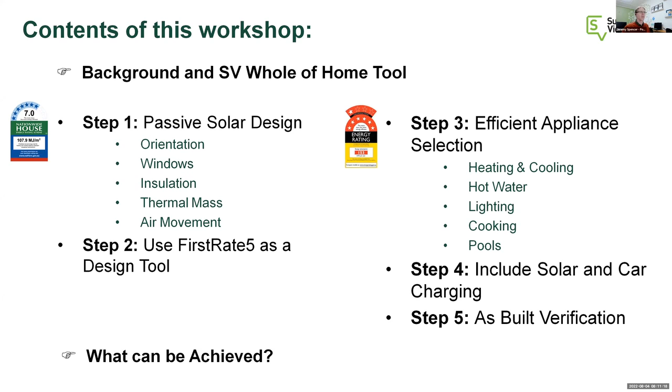And lastly, as we move into high performance, that does impose a bit of risk on builders, designers and thermal performance assessors as we're promising more. So I'm going to talk a little bit about as-built verification and what can be achieved. So a lot to get through. Let's get into it.

Background and Sustainability Victoria Whole of Home tool. So this is basically why we're here.

And what that means is that every industry in those countries is going to have to wean themselves off a fossil fuel, some call it an addiction, a fossil fuel way of producing what they do, to a low carbon or net zero carbon way of producing their product.

And if you look at that 36 billion tonnes of carbon dioxide currently being produced, 39% of that is related to the building and construction industry, either in the operational energy use of our buildings or the energy that goes into the production of those materials and the associated carbon. That's a huge amount, 39%. And if we're wanting to flatten this curve, the onus really is on the building industry, rolling up their sleeves and getting on with it.

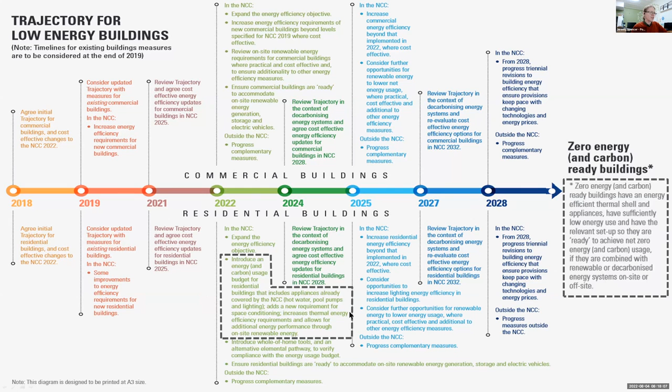The other thing I want to point out is what's happening in 2022 for residential. Let's have a read of this. It says to introduce an energy and carbon usage budget for residential buildings that includes appliances already covered in the NCC - hot water, pool pumps and lighting - adds a new requirement for space conditioning, increases thermal energy efficiency requirements, and allows for additional energy performance through on-site renewable energy.

And if that sounds familiar, that is because that's exactly what the proposal is. We'll see exactly what gets through in September, but this is the proposal at the moment.

And the way that's going to work, that's heating and cooling, lighting, pool pumps, hot water, and on-site generation. And the way it's going to work is this.

When you do a thermal performance assessment, when you do a rating, you will first of all have to get the house to 7 stars. That's a baseline - you can't go lower than that. You have to get to 7 now.

And you also have to show on your plans that you're putting in appliances that meet an average level. They're calling it a benchmark appliance. So in each one of these categories, there will be a benchmark appliance.

It's not energy generation, that's a little bit separate. But in the other 4 there's sort of a benchmark level. And if you put in a heating and cooling appliance, if everything is above the benchmark and you're above 7 stars, you pass.

The other way you can pass, you can do a little bit of a trade-off amongst these appliances - you can have, say, a heating and cooling appliance that's below the benchmark, but your hot water might be above the benchmark. And when they do the calculations, the house as a whole is above the average benchmark home.

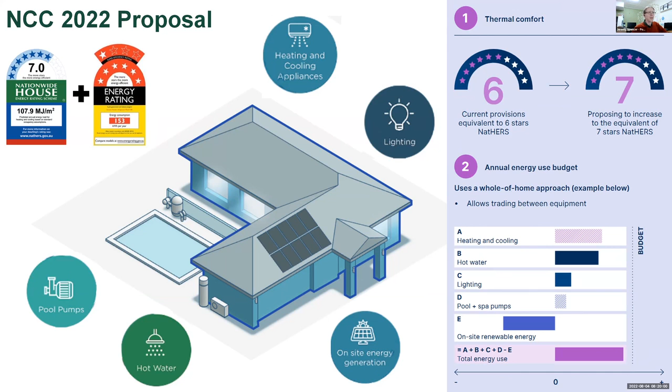The other thing that could happen is you could have all of your appliances below the benchmark, but put on enough photovoltaics on the roof to lift the house above the average energy use of this benchmark home. So that's the proposal that's coming our way.

What that will mean, of course, is that you're going to have a bit more information to provide. If you're a designer listening to this, you're going to have to start putting information on your plans about what appliances you're going to put into it. And I'll show you some of the choices as we go through this.

So this is the FirstRate5 Whole of Home Pilot Tool website portal, and I've put one of my projects through it. So what you do is you do a normal thermal performance assessment on the shell, as per normal, using FirstRate5 software in this case, and then upload it to the Whole of Home tool.

And then you're met with some pages, and here you get to put in the appliances you put into the home. So in my case, in this house, we had reverse cycle air conditioning throughout for heating and cooling - it did both - and you just put in the number of stars.

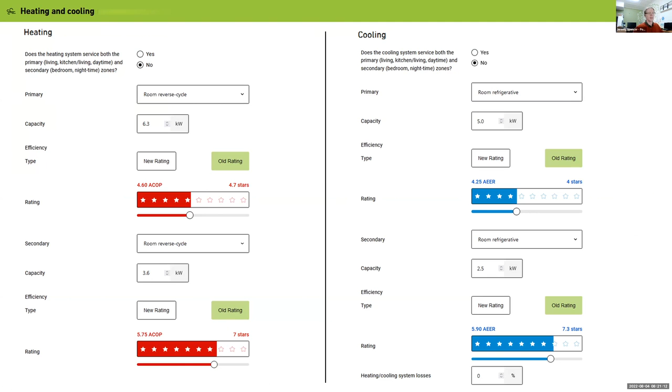The tool is quite useful in that it just tells you what information it requires. It doesn't take particularly long to find that information and put it in. I think it'll be maybe 15 minutes to run this whole simulation.

The next page, after you put in heating and cooling - and later on I'll show you some of the options that you get to choose from - but this is for this particular home that I did. This is what we had.

The next page has cooking. This was an all-electric home, so we had an induction cooktop and electric oven. But I do want to point out that under the 2022 proposals in the NCC, cooking is not part of the whole of home system.

However, under the trajectory for low energy buildings, they do talk about adding other modules later, so my guess is later cooking might be added. At the moment, pool pumps is in there, but not pool heating, so pool heating might be added at a later stage, and maybe even car charging down the track.

Water heating, we had a heat pump water heater. Like I said, it was an all-electric home. It was a high efficiency version. So we're putting in good appliances here.

Now, under plug-in appliances and lighting, you get to put in what your lighting is, either 3, 4, or 5 watts per square meter. So if you're a designer, you might want to start doing a lighting schedule if you're not already, so you can show your LEDs at 3 watts per square meter, and you pick up a few points here. If you're a thermal performance assessor and don't have that information, it will just default to worst case scenario, which is 5 watts per square meter under the construction code at the moment.

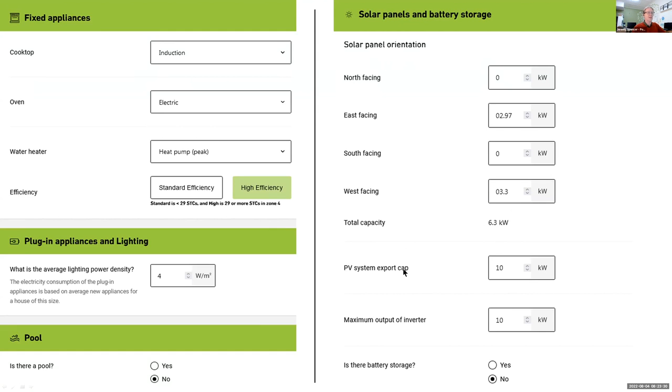All right, so that's all the information you have to add. It doesn't take very long, especially if that was already on the plans. Then you press calculate, and it simulates a year of operation and using the house.

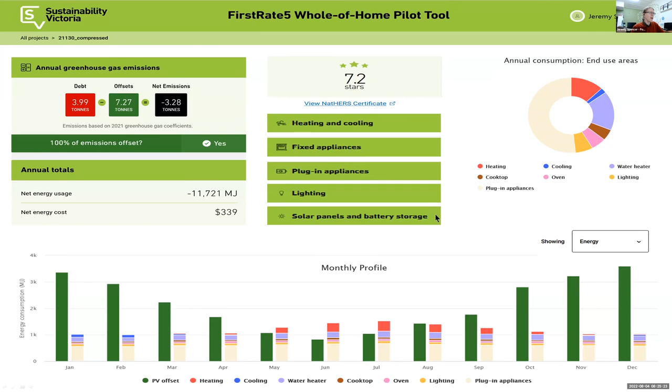The tool also splits where the energy is being used in the house, by energy use, by emissions for the different things going on in the home, and also by the cost to run those areas of the home. So this is my sort of feedback on using the tool.

I'm really quite excited about the tool. It will answer a few questions. First of all, it will answer for homeowners and for builders and designers how much photovoltaics would I need to put on the roof of this particular home for it to break even. And a lot of clients want to know that.

That's one question. Also, potentially for the savvy builder, designer or developer, you could do point of sale upsells on appliances. I had exactly this situation this week, where a client was asking me about the difference between an efficient heat pump hot water system versus an instantaneous one, because they liked that the instantaneous uses less space, which it does.

That's their good point, so we ran it through the tool. What we found was there was a $400 difference in running cost over the year — going from the instantaneous to the heat pump was $400 less per year to run. Also, the instantaneous produced over 2 tonnes of carbon dioxide a year, so there was a big saving, like a 4-fold saving in the amount of carbon that goes up into the atmosphere by going to the heat pump version.

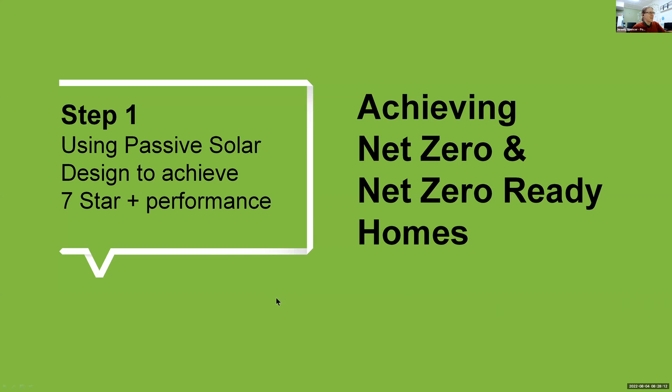All right, so step one is using passive solar design to achieve 7-star plus performance. Passive solar design, as I said, is just designing for climate and to be comfortable in that climate. In Victoria, most of the time we're trying to heat our homes, as I mentioned, so if we can get the sun to come into our homes in winter, we'll get some free heating there and lower our energy use in the home.

Likewise, in summer, on the afternoons, especially around Melbourne, we often get sea breezes — you get evening breezes in a lot of places throughout Victoria. If we can design a breeze path to pick up that, again we get a little bit of free cooling, which raises your NatHERS score a little bit.

If you can lock to the mass of the earth, that'll give you much more stable temperatures inside. The outdoor temperature can be going up and down, fluctuating, but if you're locked to the mass of the earth, your internal temperature will be much more stable. So I look at this a little bit like a solar hot water heater.

You're still going to be putting on space conditioning, mechanical heating and cooling, but in the first instance, by using natural resources you've minimized and provided most of the heating and cooling in the home, and the mechanical services are really just an extra booster — like on solar hot water, you get that booster on the back if it's not quite the right temperature. That's the idea here.

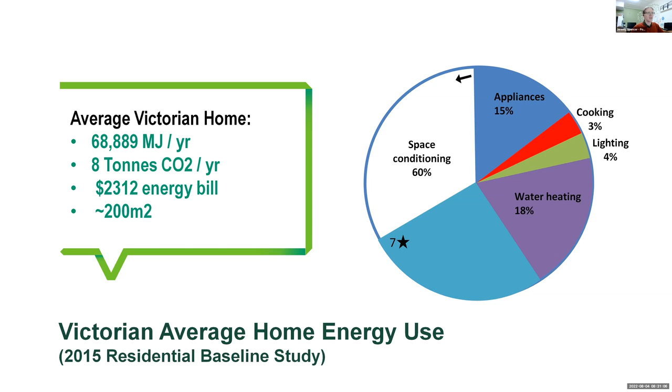However, we don't need to go to 10 stars. 7 stars is plenty to get to a net zero outcome, as you'll see as we progress. All right, let's get into the secrets to 7, 8, 9, and 10 stars.

Sorry, Jeremy, just before you jump in there, got a couple of questions that might be relevant. The lighting standard, that's at 4 watts now for housing, or we think? It depends on outdoor or indoor. I can't remember exactly, but I'm pretty sure it was 5 watts. Yeah, look, I'm not sure if that's changing. That might be one of the details we'll need to see when it actually comes out. I'm sure there's a lot of designers yelling at their screens right now. Sorry, I control the construction side of Positive Footprint, I'm not doing the design part, I'm not 100% over everything. I have a feeling it might change to 4, but I'm not sure. We'll have to wait and see in October when it comes out.

And there's no provision to include batteries at the moment, is there? You can put them in the tool, but under the NCC it doesn't talk about batteries at the moment. You can put them into the Sustainability Victoria tool and see what benefit or otherwise they may have, so it's a useful tool for giving you feedback from that point of view.

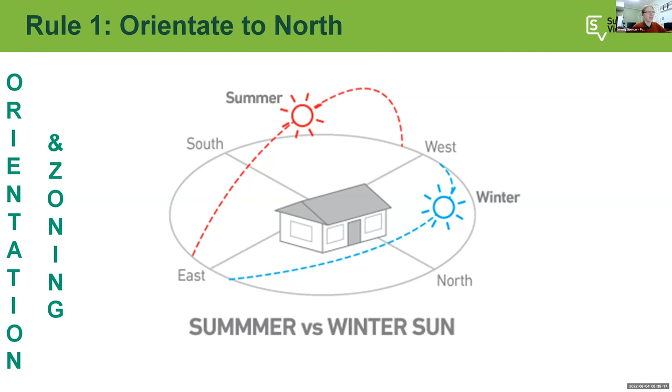So first rule: the sun rises in the east and sets in the west, but it doesn't go directly overhead because we're in the southern hemisphere. It goes on the north part of the sky down in Victoria, which means if we put our living spaces and appropriate windows on that north side of the home, we can get free winter heating for nearly 12 hours a day during winter, which is when you need it. Also, because the Earth is on a tilt as it goes around the sun, it's higher in the sky in summer, which means we can put an eave on that north side of the home to keep the summer sun out. So we're very lucky like that.

Now I'm going to give you a quick rundown of the quintessential passive solar design layout. North is up the page here. There's no overshadowing, so it's sort of perfect conditions, but this is how I like to think about things, and then we'll discuss them.

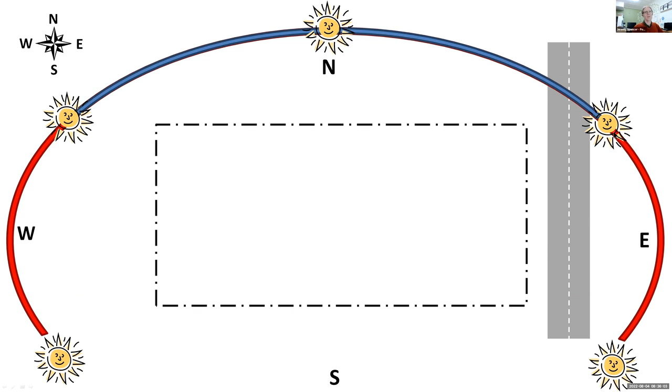First, I put on the sun path, and you'll notice it's red and blue. That's because the sun doesn't always rise in the east or set in the west - in fact, it only does that on the equinoxes. In summer, the days are longer; it rises in the southeast and goes all the way around, setting in the southwest. In winter, the days are shorter; it rises in the northeast and sets in the northwest. We can use that with our layout, as you'll see.

The other thing I always like to put on is the prevailing breeze. This particular design was in Melbourne, where we get a lovely sea breeze from the south in summer - it's the summer breeze you want for potential cooling. So wherever your local summer breeze is, that's what you put on there.

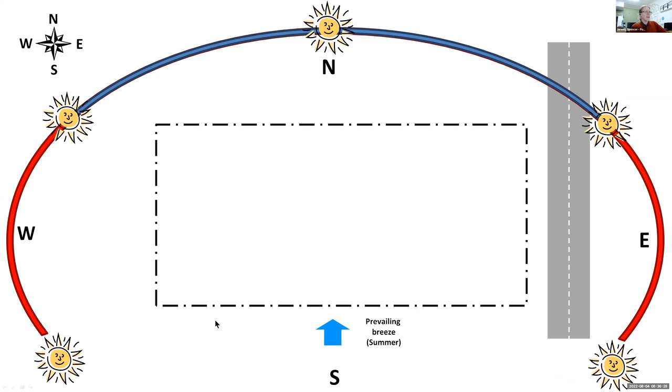This is how I generally do a layout. Living areas go on the north. The reason is that people can be in those living areas all day and well into the evening, so we want to prioritize them. NatHERS software assumes people will be in there long hours wanting comfortable temperatures well into the night, so we prioritize the living spaces by putting them on the north.

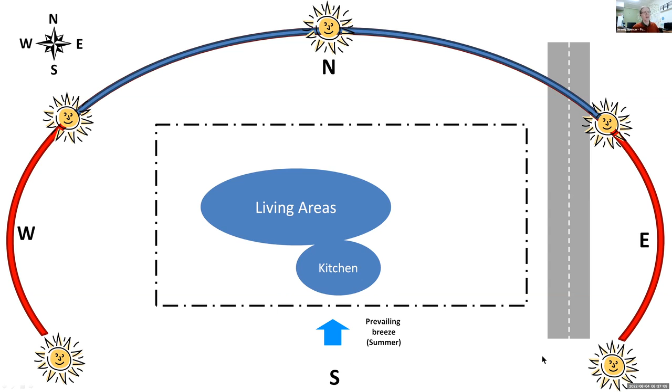I like open plan living areas - it makes a smaller home feel bigger. If we put the kitchen on this side, with windows on the south and windows on the north, we could easily have that breeze blowing across our living space in summer, where people are hanging out. Not a bad setup there.

Kids' bedrooms I put at the back of the home - a fairly standard place to start, good for a bit of security, but I've also put them there because in summer the sun sets in the southwest. The last thing you want in summer, when the sun's really low and getting under all the horizontal shading you've put out, is that last burst of sunlight coming into the living space. So the kids' bedrooms act almost like a buffer from that summer sun.

Of course, you don't want the kids' bedrooms being uncomfortable at the end of a summer day either, so you wouldn't want the windows too big on that west side. You might want to put in some shading from that summer setting sun, which of course doesn't block the winter sun. A bit of landscaping is always quite useful there.

Master bedroom at the front of the house, just to split it away from the kids for a bit of privacy. We could have put it on the south, but since there was space, we put it on the north, because the more rooms you can put on that north side of the home with windows onto them, the better the performance of the home is going to be.

That left the space on the east for the garage, which serves a similar purpose to the kids' bedrooms, but this time for the morning sun. You don't want your home heating up really early when the sun's rising in the southeast - the later you can delay the heat-up of the home, the better. So the garage acts as a buffer from that morning sun.

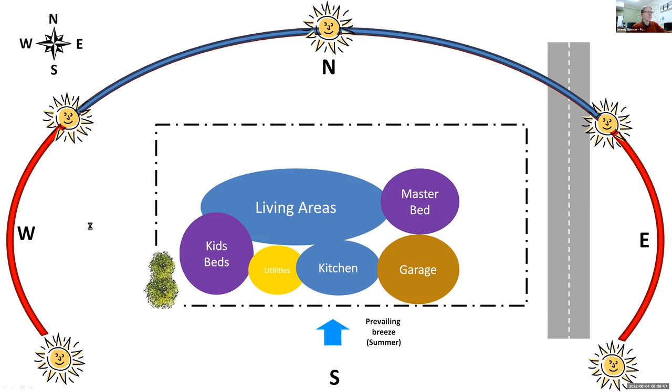Here's the outcome of that particular floor plan - you can see the living space, bedrooms, everything just like I showed. This one came to 8.1 stars.

I say that mainly to point out that this design is not perfect from a passive solar point of view by any means. You can see that the master bedroom area, when the sun rises in winter, actually gets in the way of the sun shining into that living space - in fact it probably won't get through until the sun moves around into the mid-morning.

My point here is that you don't have to be perfect. We could have gone straight across there, but we actually wanted to have a setback courtyard, so you have a bit of a better outdoor facility for that family who lives in that home. But this is what I ask myself, or what you should be asking yourself as well: are my living areas getting north sunlight most of the day in winter? So it's really just the logic that I'm getting at here.

With all of these rules, you don't need to know too many formulas and that sort of thing. There is one that I'm going to show you, but most of all, it's about the logic of it. I'm just trying to get sunlight into my living space most of the day in winter. And if you do, that will be a tick.

If you can also answer this question, how many other rooms are getting northern sunlight in winter, and some of the other rooms are also getting northern sunlight, well, that's a big tick. And you can say, right, I've done this rule pretty well. If the answer to both of those was no, well, that would probably be a red flag. And you'd want to hit the other rules that I'm going to go over shortly, you'd want to hit them well.

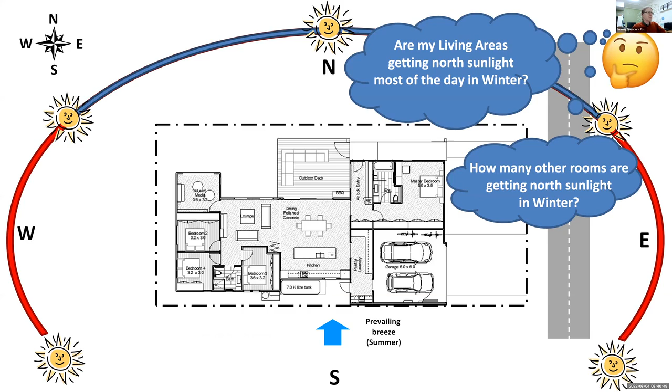This is the particular home in question. Two things to point out. One, it doesn't have to be this style. Style is independent of passive solar design, it can be any style.

Though I do want to promote the idea of making a spot for photovoltaics. Photovoltaics are one of the technologies that makes the whole net zero thing we're trying to achieve as humanity possible in construction. And also with potentially car charging later on, photovoltaics are only going to become more useful in the home. So if you can make a spot for them to go, all the better.

Okay, another thing to think about when you're looking at designs that come across your desk, this is the elevation. So I always start by opening up plans. I look at floor plans and look at the layout - are the living spaces on that north side? Great. Next thing I'll do is look at elevations, and I'm wanting to see which elevation is likely to be north. And the one that has the most windows, ideally, is the one that's north.

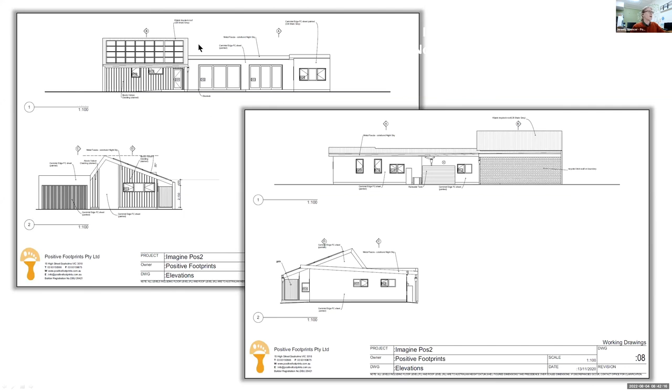So in this case, this is the elevations of the design you just looked at. You already know that this one up top is north. But you should be asking yourself, when you're looking at your own plans or plans that come across your desk, can I work out which direction is north by looking at my elevations? And if you say to yourself, well, I reckon that one's north, but you find out that's actually east or south, that would be a red flag. Maybe send it to the thermal performance assessor or just query it with the designer, if you're the builder looking at it.

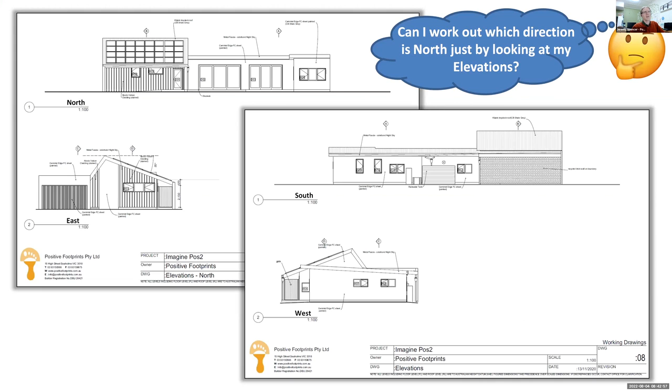I put all the directions back in there. So that's basically the question you just want to ask yourself there. That's all about orientation. And it's as simple as that - I know that was a perfect situation, by the way, there was no overshadowing. If there is a neighbour on the north, well, maybe you've got to go double story to get that sunlight coming in if you want those 3 points.

I should also point out that with that particular design, I did a couple of things. I tried rotating it east and west, because some people were worried - well, what if I don't have a good block, what if it's got a bad outlook? If I rotate that design, the set of 8.1 goes down to 7.7, 7.6 if I rotate it east and west. If I rotate it the whole way around, more like 7.5, around about a half a star decrease. And that's because I didn't go overboard with windows, which we're going to talk about right now.

The other thing that I also modeled was, what if it's facing north, but we've got a 4-story neighbor all the way along the boundary line?

Worst case scenario, it went down to 7.2. So my point there is that orientation is great - you can pick up some fantastic points, but it's not a killer.

Rule number 1: we've orientated our floor plans to try and pick up northern sunlight, and it might mean you move the living space around. If there's shading at the front of the block, living space goes to the north. If there's overshadowing at the back, living space might go to the front or upstairs. You've done what you can to get northern sunlight into the living space most days in winter - that's a tick, and you're on your way to getting into that 7-star band quite easily.

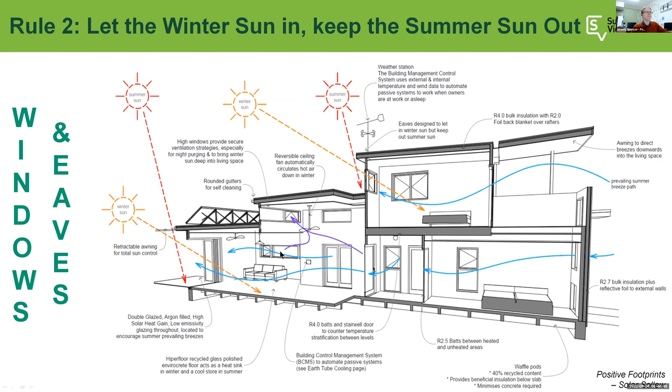Window consideration is crucial to performance. I used to do literally thousands of energy ratings as I was getting this company going. What kills designs is having too much windows and having them in the wrong spot. Once you've insulated a home, up to 40% of its heating energy can be lost through windows on average, and up to 87% of its heat is gained through windows. So windows are really important.

To put it into perspective how important it is not to overglaze: windows are great during the day if sunlight's coming in, but they're not great at nighttime, typically during most of winter - they're just losing heat for you.

If we look at this wall, so you understand how much heat they lose - this is a 90mm stud wall, and in the stud work we've got R2.5 batts, maybe R2.7 in this one. We've got a permeable reflective foil on the outside facing onto an air gap, maybe another half an R rating. Then if you include the plaster and the Ecoply on the outside, I've got about an R3.5 of insulation across the wall.

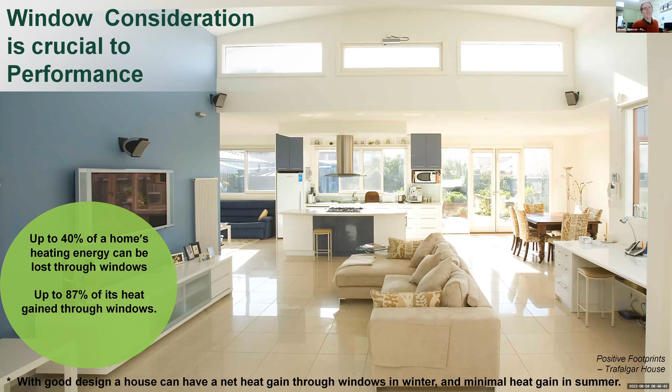Now these windows, in fact, are double glazed, argon filled, low E coated, timber windows - pretty high performance. Even with high performance, they get to an R rating of about 0.5 versus R3.5, so they're still losing and gaining heat 7 times faster than the walls next to them.

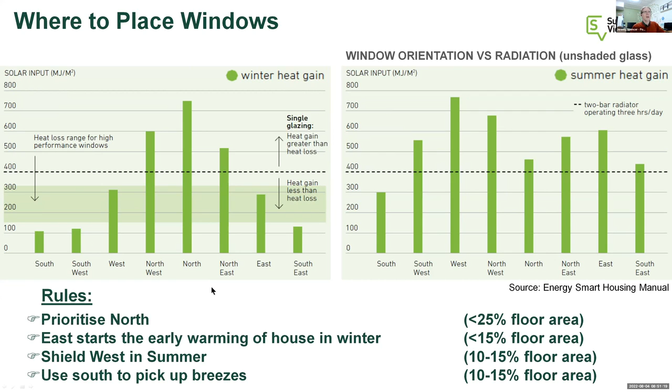Now, if all those percentages get a little bit hard, I don't actually use that when I'm looking at other people's plans, doing some sort of consultation. What I'll do is simpler: I'll add up the total floor area of the whole house, and add up all the square meters of window, and ask, is the window to floor area less than 25%? And are most of the windows on that north side of the home—is the highest proportion of windows on the north side? If yes, then tick, this house is probably going to do pretty well.

Now, you can push those areas a bit. If you start to have high performance windows and mass, you can maybe push up to 30%. We'll talk about thermal mass shortly.

Now you have an idea of how much window area you need and where it should go. But if you're putting them on the north, you also have to think about not putting them into shade. You can have shade on the north side of your home—other houses close by that are shading that north side. Like in this situation, instead of having a floor to ceiling window, you might want to raise the sill so it's out of the shade.

If you have an articulated face, even though it's facing north, you're going to get a bit of shade on those windows. You're trying, because the window is the weakest element of the thermal skin of the home, to just get into the sunlight. That's the main point of this particular slide.

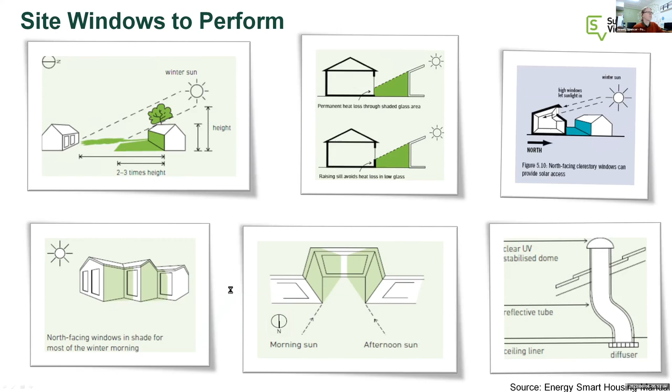So we put most of our windows on the north. How do we shade the windows in summer? Even though north windows are still pretty good in summer without eaves, they become even better with eaves, so you definitely want to put them on.

There is a simple rule that works really well for Victoria, called the 45% rule. This is a rule for how to design an eave that will let in the winter sun, which is lower in the sky in winter, but keep out the summer sun, which is higher in the sky.

It works for the north, but doesn't work for east and west, because the sun is rising and very low in the sky when it's rising, and very low in the sky when it's setting, and will come in under any eaves. East and west, you either want to minimize windows, put in some plantings, or have some vertical shading, something like that. But for north, we can design an eave that will just sit there and do the job.

This is how the 45% rule works. You measure the distance from the sill of the window to the underside of the eave, and whatever that distance is, your eave should stick out 45% of that distance. That includes to the furthest shading point, which is usually the gutter.

So for instance, if that height there was 2 meters, 45% of that is 900 millimeters. Maybe my eave has a 150 mil gutter. That leaves the actual eave part at 750 mil. So I'd be having a 750 mil eave sheet there, or cutting down to that.

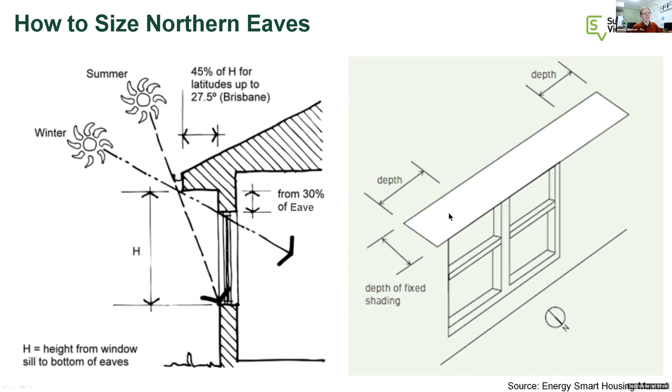So that's how you design the perfect eave on north. Just remember, the sun is not always directly in front of the window, so if you are just putting eaves over windows individually, just run them past on either side by whatever depth you worked out for the eave, and that'll do the job.

And then I like to think, when I'm looking at plans, that I am the sun. Obviously, if you're a designer, you can model these things in your software, but it works really well.

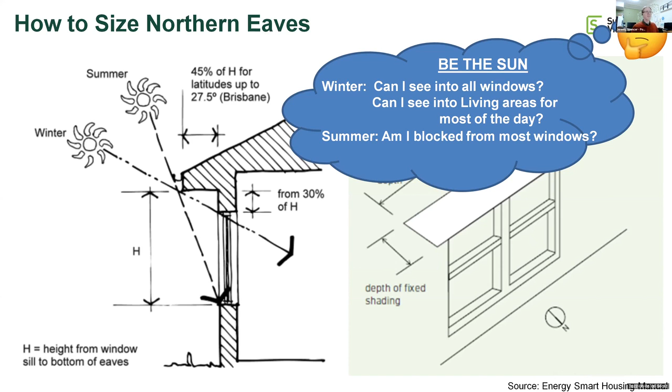Then I do the same thing for summer. Now I'm at 78 degrees or so for Melbourne, and I'm going much higher in the sky, looking down on my plans - are the eaves actually stopping me from seeing in? So you can just imagine yourself as the sun.

All right, so assuming you've used the 45% rule and designed your eaves well, the next thing to think about is the performance of the windows you're putting in. They're mostly on the north, then east, west and south, but still they're the weakest element. The higher the performance you can achieve for your price budget, the better your house will perform. Windows make a significant impact, possibly the biggest impact of them all.

So what do you need to know when designing or choosing windows? There are three different numbers you need to know: the U value, the solar heat gain coefficient, and air leakage. The most important of those is U value, so I'm going to start with that.

U value is just a measure of how well a window conducts. So with windows, instead of talking about resistance and R values, they talk about the opposite, which is U values. Now, you don't want a high U value — you actually want a window that resists heat flow and keeps the temperature inside the home, not letting it out in winter or gaining heat in summer. When we're talking U values, you need to be aware there's UW, which is a whole-of-window U value.

Most documentation you pick up will be talking about the whole of window, and that's what you want. But sometimes you might pick up a U value that's just talking about the glass, or the U value of the frame, or if it's double glazing, the U value of the spacer. All those things get added together to become a U value for the window. So just make sure you're looking at the right data.

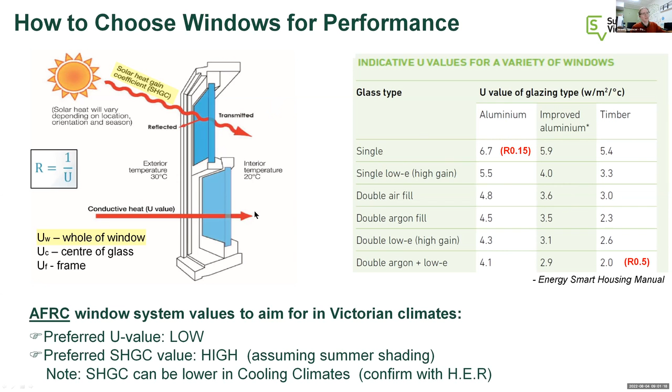Okay, now that you've got that information, how do you actually choose windows? Well, there's a fantastic resource for the industry called the Windows Energy Rating Scheme, and all of our windows have to get rated under that. You might have seen AFRC, Australian Fenestration Rating Council, or certification, on the previous screen.

They all have to be rated under the same protocol, and all of the windows that get rated go to this Windows Energy Rating Scheme dot net database. Every now and again, I like to go to this database and just see who's making good windows.

You don't necessarily need to think about whether it's double glazed, single glazed, low-E coated, or argon filled. The U value covers all of that performance. Those things all add into the U value number, so really you can just judge things on U value.

So I like to put in a U value here. I like 2.5 or so, but anything under 3 is pretty good. And for solar heat gain coefficient down there, I put 0.4.

Then you just search the database. You can choose what type of window, what type of opening. We like casement windows, so I put that in, press sort, and you get a big list. This list actually goes down to 98 items in Victoria for casement windows that satisfy my criteria.

Once you're on this page of the website, I do three things. First, I rank by U values. You click on this and it ranks them by the U value.

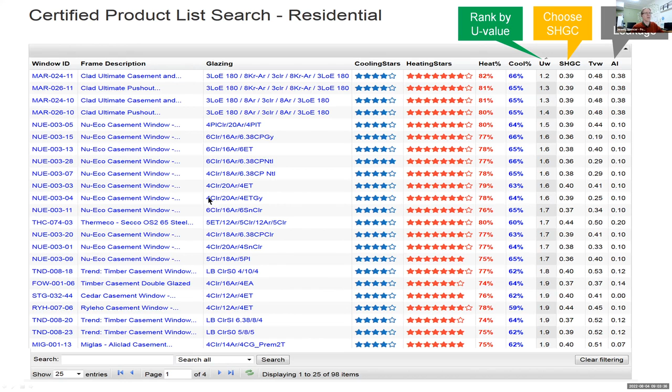Then you can go to those window manufacturers, send them some window schedules, and get an idea of their price points and what they have to offer. Then you can choose ones that fit in with your price budget and perform the best you can for the price budget of the house.

So very useful resource. That's a lot in rule number 2 - probably the most intense information rule. But now you know where to put windows, approximately what size of windows to put where, how to choose good performance windows, and how to shade the north side of the home.

So you'll be well on track if you incorporate some of those rules into your design, well on track to getting 7 stars and above. All right, the third rule is keeping the heat in and out, and that is insulation.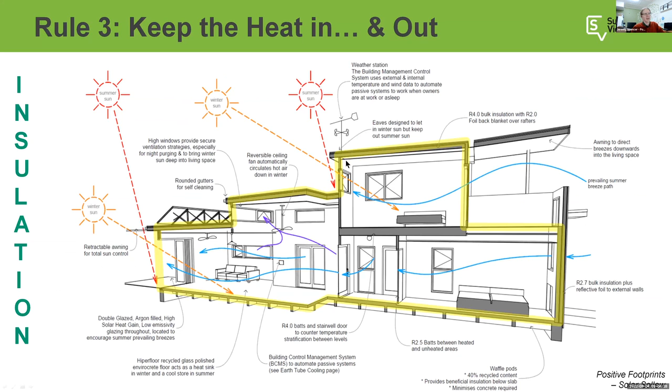With insulation, as you can see in this picture, you want a complete insulation layer all the way around the house. You don't want gaps in it, ideally. You want to think thermal shell.

One thing I want to point out is garages - you should consider those. If you're not already considering those as external spaces, you should, because while they're included in the NatHERS rating, NatHERS assumes a lot of air leakage is going to come through garage doors, which is pretty normal. And often garage doors might be 1 mil steel - they're very conductive, so garages get pretty cold.

So my advice would be to run whatever insulation you run on the external walls just around on the internal walls too. And don't be silly like I did here and put a sliding door going into a garage - they're very, very hard to actually seal. Casement doors closing back onto a bulb seal are much better - swinging doors.

Now this gets to Phil's question from before - should we do internal insulation? The answer is yes. The reason is the NatHERS software zones off the home and assumes that the laundry, WC and pantry don't necessarily need to be as warm as the living spaces, so you can zone the home. Some insulation between the utility areas - pantry, laundry, ensuite, those sorts of areas - they should have insulation around them. You'll get a bit of a lift in the tool, and not only that, your heating and cooling requirements for your home will go down.

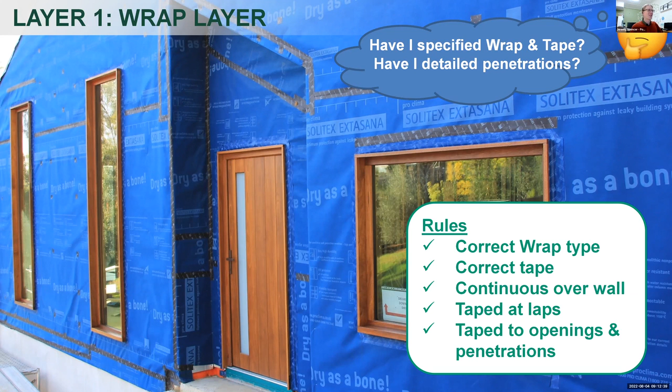You should be taping to all penetrations and so forth. The question I ask myself is: have I specified wrap and tape on the plans, and have I detailed penetrations? Don't leave it up to builders. It's hard for a builder to know exactly how, with windows, to work out the flashings, how to make sure water doesn't get in, and how to tape to windows depending on cladding types - there's a lot going on with windows. So do the builder a favor, if you're a designer listening to this, and put on a detail of how this all works together.

But it does make a big difference. Bradford did some testing a few years back - they clad a big room and sucked air out of it to induce 50 pascals of pressure, the same as a 33 kilometre an hour wind speed blowing over the home, to see how much air infiltration gets in with different strategies. They found if you just put on wrap with no tape at all, you get a 20% reduction in airflow through the wall.

If you overlap and tape all overlaps and tape the penetrations - so taping the wrap to the window, in this case with a couple of windows - you get a 58% reduction in air infiltration. If you do all that plus tape to the top plate and the bottom plate, you get an 82% reduction. So for the sake of a little more tape, think about taping to the top plate as well as the wrap and penetrations. That's easy to do - another couple of rolls of tape will usually do it, maybe 4 rolls.

And taping to the bottom - just make sure that if you're taping to the bottom, you're thinking about your drainage. You may be taping it to the flashing layer at the bottom, so water can still run down and off to whatever drainage, and doesn't run underneath your bottom plate. But it does make a difference.

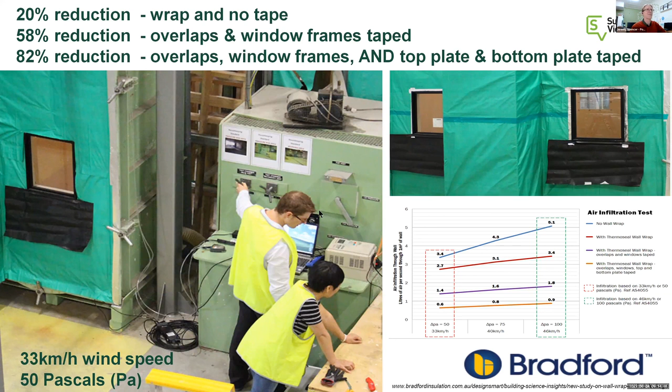The second layer is your bulk insulation layer. Insulation is actually really easy - the rules of insulation are simple, the hard part is the installation, which Sean will talk about. People often ask me how much insulation should I put in, and the answer is as much as you can - the more the better. It's sort of like a water tank: how big should my water tank be? Well, the bigger the better, so it'll catch those big storms.

But most of the time you're only using the first 5,000 litres or so of water in the tank, and most of the time the tank's empty.

It's the same with insulation. You can put more on, and the more you put on the better, but there's a diminishing return. You get a lot of bang for your buck for the first R1 you put in. For the next R1, you get about half the bang for the buck as the first one. For the next R1 after that, you get half as much return again. Basically, there are diminishing returns, so these tend to be pretty cost-effective.

Sizes to put in also work with standard construction cavity spaces. So what will I put in? On the roof, there's usually a bit more space, so typically I'll go for an R4. And these, by the way, are what I will put in whether we design 7 star, 8 star, or even 9 star homes.

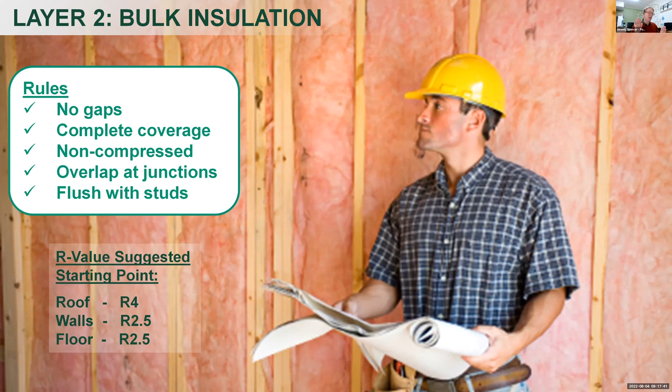And the other thing that's quite important is that your insulation sits flush with the face of the stud, so that when you put your plasterboard on, there's not a big gap behind it. If there's a big gap and there's leaks somewhere, you may find that you get airflow circumventing, going through any leak past the insulation and running down between the insulation and the plaster, and so effectively that insulation isn't working for you. If you make it flush and the plaster sits back against it, there's not that air gap for that pathway to happen.

The last layer of insulation is the tightness layer, and for standard construction that's plasterboard. If I was doing a passive house, that would be lined with internal membranes. But for standard construction, you can get a hell of a long way just by trying to limit the amount of holes in the plasterboard. Plasterboard itself is a fantastic air barrier, especially once it's painted.

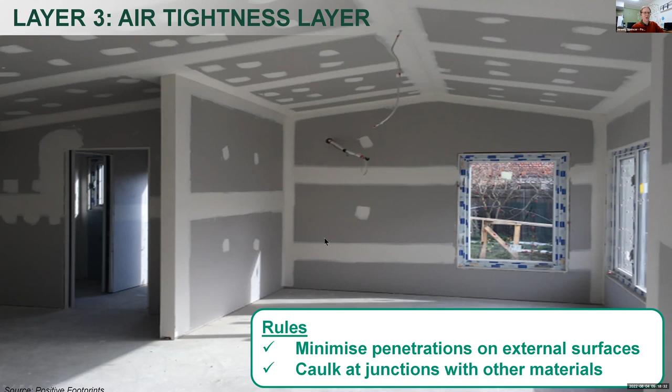It's the gaps and cracks in it that let it down. So things like square set cornice - fantastic joins that last well over time for stopping airflow - and try not to have too many lights and things hanging down. Don't have banks of downlights with holes cut through it, that sort of thing. But Sean will go over all of those; I'm just pointing that out to you now.

The reason it's important though - why am I banging on about tightness? The reason is that the NatHERS software, you see this red line here - NatHERS software assumes that if we have a 50 Pascal load of difference in air pressure between the inside and outside of the house, it assumes 10 air changes per hour at 50 Pascals of pressure. That's what the software assumes. So really, as one of your contractual documents, you should be designing a home that is less than 10 air changes per hour at 50 Pascals of pressure.

Now, not many people test their homes. The CSIRO did a test back in 2015 on new home construction in different cities around Australia. For Melbourne, this is what they found: the average air changes in new homes was 15.4 air changes per hour. So technically, they're not actually meeting the NatHERS rating there.

There's a couple of other lines I've got here. There's 5 air changes per hour. If you get a house down below that, there becomes a point where the house needs more fresh air to come in, because if it's just a sealed box and you're breathing and living in that space, you can have undesirable chemicals building up. So you do need some fresh air to come in. Under 5 air changes per hour, heat recovery ventilation is required.

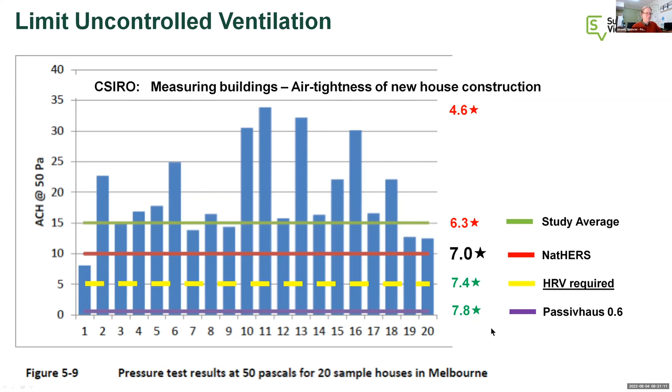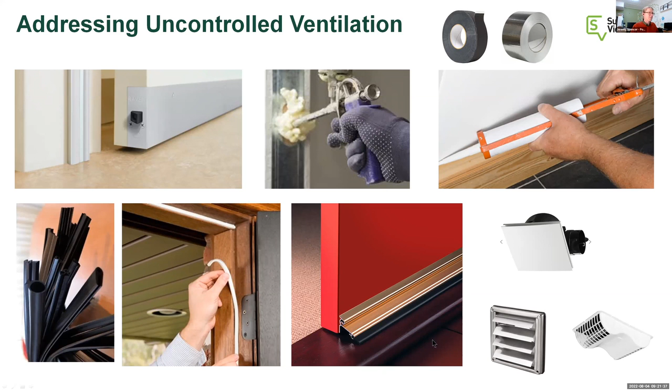It's reasonably easy to make a big impact on the tightness of a new home by simply caulking, gap filling, putting on extraction fans that don't duct straight to the roof space but duct to the outside and have backflow dampers on them. By the way, that's coming in NCC 2022 as a requirement. These things do make a big difference on your tightness levels.

Another thing to point out where a building can potentially fail is thermal bridging. Sean will talk about this, but I want to touch on what I'm looking for when I get my engineering plans: is there any steel that passes from the inside to the outside? The reason is steel is extremely conductive. Compared to hardwood, steel is approximately 500 times more conductive than wood.

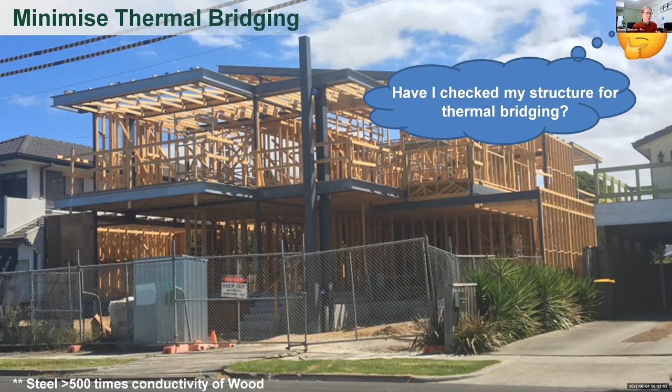Compared to softwood, it's more like 1,000 times. So if you have steel on the inside of your house that passes through to the outside, that could be leaking heat out when you want it to stay in, or bringing heat in when you don't want it inside. It can potentially ruin the star rating or the lived experience of the clients there. So what I ask myself is: have I checked my structure for thermal bridging? That's a nice question to ask when you get your plans back. Is there any steel passing from the inside to the outside? If there is, you want to make sure there's some sort of break, or it's wrapped with insulation or something.

Just a good question to put in there - is floor insulation required between a basement car park and the unit or floor above? It's a performance standard, NatHERS, so it's not required. Hang on, this might be outside of NatHERS - there may be fire prevention reasons that you'd be putting insulation in an apartment situation. So check that, that's more something you look up in the construction manual.

However, in terms of thermal bridging, we have had reports of first floor apartments having condensation under the carpets because they're pretty much fitted over a cold concrete floor. The temperature of the concrete under the carpet is much colder than the temperature inside the unit, so moisture in the air condenses under the carpet. So that's a really good reason to insulate the roof of the car park, if you like. I've seen that done in a couple of places I've visited recently.

I'll just finish that thought. NatHERS is a performance software, it doesn't give you any rules. However, it's not going to perform well or get to 7 stars in a house with an underground car park, say, if you don't insulate above that and the rooms. You're going to have those issues that Phil talked about.

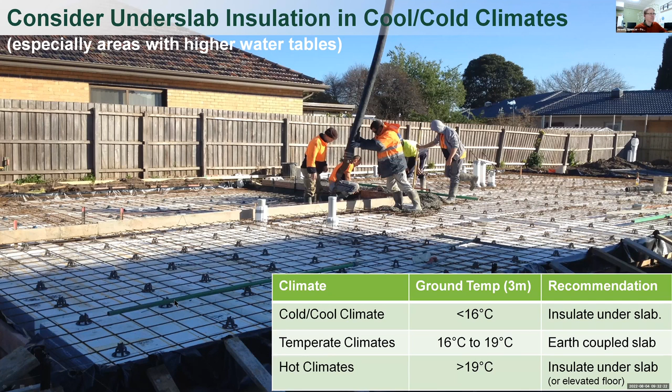In this case, it was a waffle slab. But before you do it, it's easy to know whether it's good or not - just check with the thermal performance assessor when you get your assessment done. It's very easy for them, if you've got a slab floor, to tell you what performance and star rating you'll get if you put insulation under this floor. And if it's good for you, you can talk to clients and maybe do it.

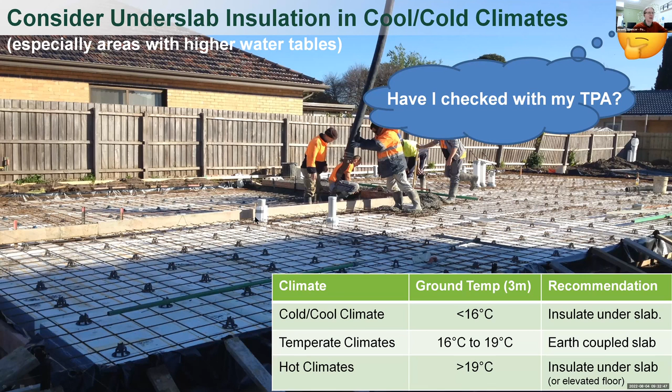So that's basically all you need to know about insulation. Of course, the installation of the insulation is the trick, and Sean will cover that next week. We've done laying out the home, choosing good windows, working out how much to put where, eaves, insulating well, and some general insulation levels. The thermal performance assessor can test those insulation levels - you can start with those general ones I noted, and then if there's more space, ask them what if we put R6 batts in the roof, and they can give you feedback pretty easily on that.

Now we get on to rule 4, which is thermal mass. You don't need thermal mass to get 7 stars, but it will give a bit of a performance boost and make it a little easier to get there. The way I think of thermal mass is this: in a lightweight home, energy comes through those windows, if designed right, in winter, and the home heats up pretty quickly. You've got good insulation that holds it in, but the home can only hold so much heat. It will heat up quickly during the day, and then start to radiate.

The whole house will get warm and it'll radiate that heat away. And then when the sun goes down, even though you've got good insulation, it's not holding very much heat within it, and it will cool down reasonably quickly.

If you put some mass in that home, it's a little bit like having a glass of water and you're pouring water in - that's the energy coming into the home. A glass of water can only hold so much energy, but if you put some mass in the home, you can now hold a lot more energy. It's a bit like turning that glass into a bucket. It can hold more water, it can hold more energy, or turning into a bathtub, depending on how much mass you put in.

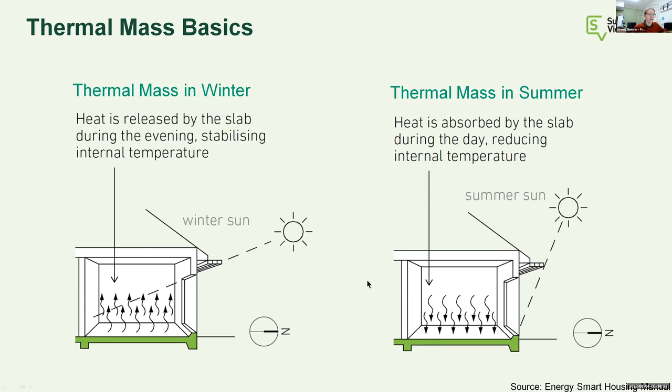And we find that we can get homes quite easily to high 7s, 8 stars, 8.5 with lightweight construction. But to get it into those very high ratings, a bit of internal mass does help. However, there's a cost benefit analysis that you want to do at this stage. And that's why it's a good idea to check with your thermal performance assessor, should I put a heavyweight internal wall in, and where should I put it? And how big is it going to be, and then you can work out whether it's going to be a cost-effective strategy for you. The other thing, I've got a little note here: consider embodied carbon.

With a lot of massive objects, bricks and so forth, they've often been fired in a kiln, and they've got a lot of energy that's gone into them, and so a lot of carbon has been released in just making them. Same with the cement - a lot of carbon dioxide gets released in the creation of cement. So you may very well find, if you're also looking at the embodied carbon point of view, and NatHERS doesn't do this, but you might also find that the operational savings of putting in some mass and getting a bit of a bump in your energy rating is not enough over the life of the house to offset the energy that's gone into it from a purely green point of view.

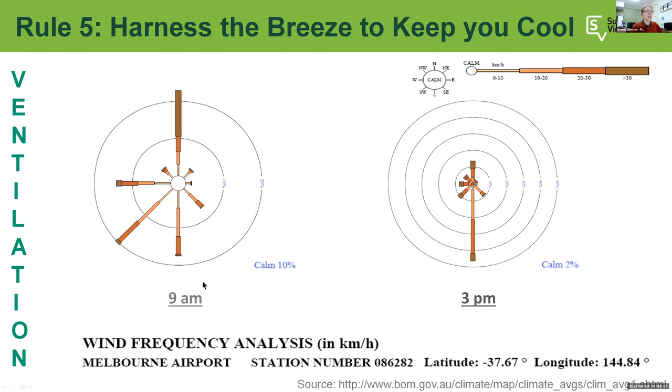If you don't already know where your summer breezes are when designing or looking at a house, you can go to this Bureau of Meteorology website, and I believe you'll have access to these slides later if you want that link. You can find your local weather station close to where you're designing or where the house is, and find out yourself and get your own wind roses and download them.

Once you've got that information - with breeze paths, it's as simple as designing so that breeze can blow through your house from wherever it's coming from. You don't want a situation with one opening where the breeze can't go anywhere - it's not going to want to come in. Similarly to before, where I talked about plaster as a tightness membrane: if you've got plaster that's reasonably tight on the inside, even with gaps and cracks on the outside, the air's not going to want to come in because it's got nowhere to go.

So for your breeze path, you actually want it to be able to come in and go through. You want an opening on the other side - two openings in a room, or down a corridor and then another room, not too far away. You don't want the breeze to have to go in and out too much. It wants to be easy for it to get through.

You can induce breeze. If you've got highlight windows, hot air naturally rises and will draw in wind or breeze from the outside. If there's no prevailing breeze, it will draw some in and replace your hot air with cool air. Fans also - they don't technically cool anything, but they blow air across your skin, which evaporates moisture off your skin and gives you a 3-degree cooling effect locally.

And lastly, don't forget casement windows on the sides of homes. If you've lined up the breeze path with openings on either side, the windows on the side of the home, if you have them with casement, you can angle them so they're all open to scoop in that prevailing summer breeze. Nice little tip.

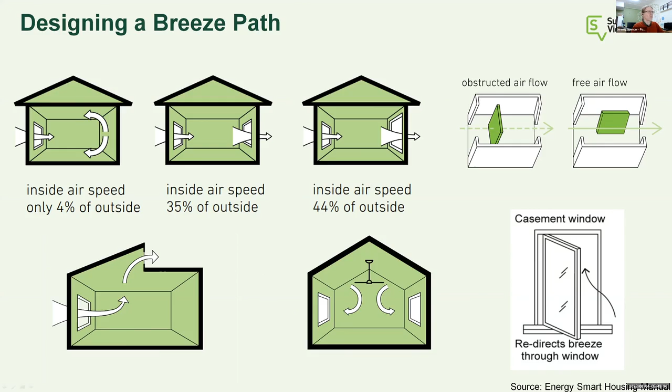Once again, I just imagine I'm the wind, like I imagined I was the sun when looking at plans, and I ask myself: is it easy to get in and out in the direction I want to travel? In my prevailing direction, will it be easy for me to blow in and out? And am I blowing across where people live in summer? If yes, then that's a big tick.

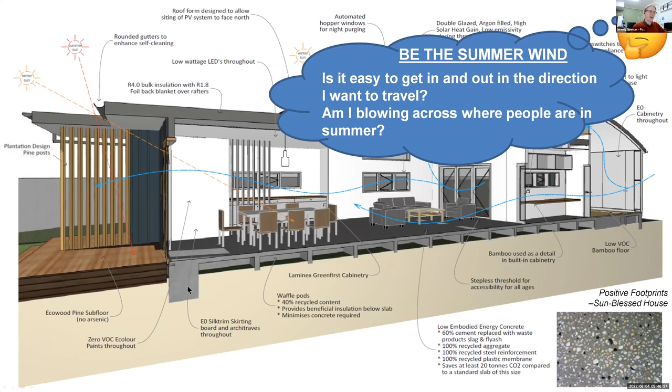Now, it should be said that because we're in Victoria, most of the time we're heating and not so much cooling. This will be lovely for people living there in summer, and you'll get a bit of advantage in the NatHERS software, but not a huge amount, because for most of the year we're trying to keep our homes a bit more closed and we're heating instead of trying to get cooling. This would be different if you're designing for up in the tropics where you're trying to cool all the time - then breeze paths become much more important within the NatHERS software. But still, for just comfort, living in homes with a good breeze path is great when that breeze comes through.

All right, so those are all the rules of passive solar design, and that is the level of knowledge you need to actually work with passive solar design. You don't need to know any more because the thermal performance software does all the calculations for you. All you need to do is understand the logic of what you're trying to achieve, and as long as each one of those rules gets a bit of a tick - it doesn't have to be 100% tick, 70% tick is fine.

Then when you get your rating done, you'll typically be 7 stars or above to start with. So the next step is to use First Rate 5 or any of the NatHERS tools as a design tool to further improve the rating.

For those who don't know what thermal performance assessors do: they get the plans from the builder, often at the point of getting the building permit, when the building surveyor asks if they've had a house energy rating. If not, the plans get sent off to the house energy rater or through the designer, either way.

The thermal performance assessor sits down with the plans and enters all the details into the software - floor areas, wall areas, ceiling areas, what they're made of and finished with, timber floors, carpets, insulation in walls, floors and ceilings, window types, eaves, and overshadowing from other buildings. Everything goes into the model, which uses the postcode to pull up 30 years of local weather data and simulates a calculation for every half hour of every day over 365 days.

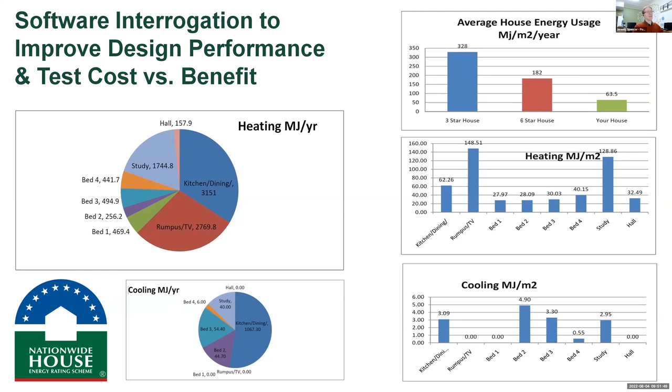So it can be sold to them in that way. But that would be my recommendation for any thermal performance assessors listening to this - they might want to start thinking about how they would do such a report and how they would charge for it. It does mean at the end there's still going to be that compliance report where there'll be changes between the concept stage and final stage. So it is an extra charge, but one well worth doing.

Okay, so that is everything to do with the thermal performance. And if you've done it right, if you've designed right and it gets built right, well effectively you've knocked off a third of the pie. But now you can see, if you look at this pie graph, we've still got two thirds of the pie left.

And this is why whole of home is so useful, because thermal performance can only go so far, whereas whole of home looks at each area of that pie graph, and we can address each area to really minimize the energy use in the home. And the first area to address is - we've knocked off most of the space conditioning, but there's still space conditioning needed. Now we can provide that amount of space conditioning efficiently or inefficiently.

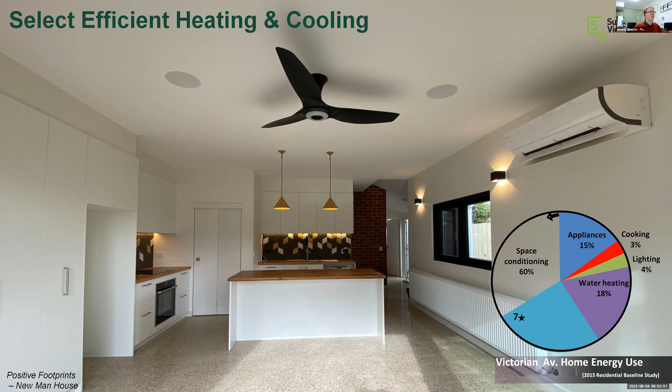In this house we use reverse cycle air conditioning. We actually use heat pump hydronics as well. They liked hydronics - we didn't need both, but they liked the hydronics during the winter.

So in the tool itself, these are the options that you get to put in. You get to put in ducted reverse cycle, ducted gas, gas hydronic, room reverse cycle, room gas, electric panels, slow combustion, wood, in-slab electric. And for cooling, you get ducted refrigerative, ducted evaporative, and just room refrigerative if you're just doing individual rooms. And there's a little note down here that the whole of house proposed benchmark is a 3-star ducted heat pump, so that's what you want to get at least as good as through the home.

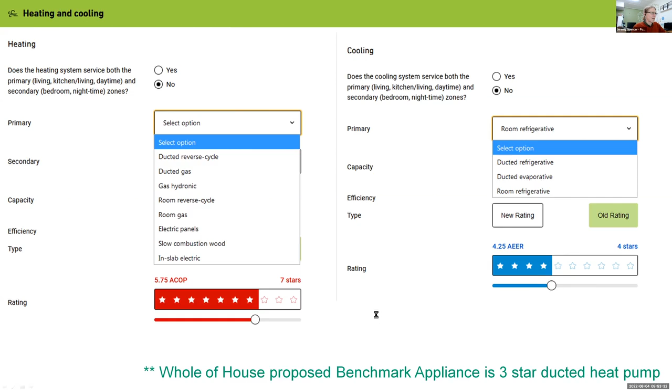And I want to talk to you a little bit about heat pumps, because we use a lot of them, and we always choose, where we can, reverse cycle air conditioning or in this case heat pump hydronics. They're both heat pumps - reverse cycle air conditioning is a heat pump. And even if you might have heard the word heat shifter, that's another heat pump. These are all different words for this heat pump technology.

So what you're looking at now is a standard split system - that's another different word for a heat pump. The split system has an internal head where it blows the heat and the cool, and then has an external compressor motor on the outside. And it's worthwhile explaining and knowing how these things work, because this, along with photovoltaics, is one of the technologies that makes net zero a possibility.

What happens is there's a loop of pipe that runs around between the internal and the external head, and inside that pipe is a refrigerant - it's a gas. Let's say this is in heating mode. What happens is the gas comes down here to the outside and goes through this thing called an expansion valve, and that expands the gas. Whenever you expand the gas...

Whenever you expand the gas, it gets cold. You might have felt this doing the car tire, blowing up the car tire, and you feel the gas rushes on your hand at the petrol station - it's quite cold. Or if you're trying to do up the barbecue gas bottle and it rushes on your hand, quite cold, because that's compressed gas that's expanding out and becomes cold. In fact it becomes around about negative 40 or so degrees - someone might correct me on that, but it's cold. And on the outside of your house at night time, it might be 0 degrees, might be -5 degrees on a cold night. But compared to negative 40, it's still hot - there's still heat in the air to grab.

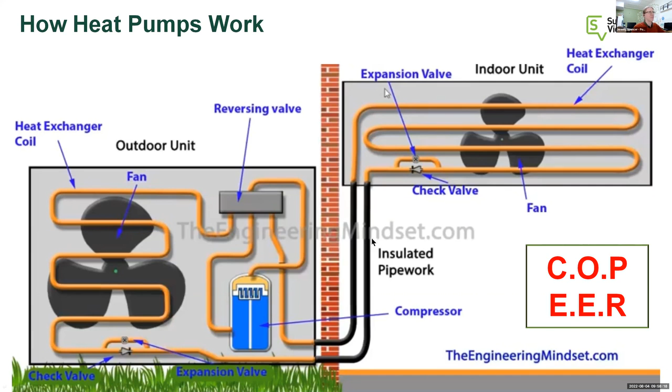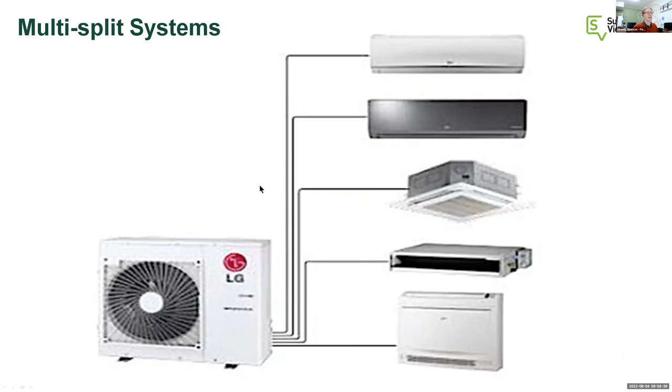Now, with split systems, you don't just have single splits - there are also multi-splits. You can have one motor, one compressor, running multiple heads in the home. They can be cassette types, wall types, ones built into bulkheads as vents in the wall, even radiator type panels. Or you can do a reverse cycle ducted system, which is the benchmark product, typically a 3-star version. They're less efficient typically because of the ductwork - you lose a lot of heat to the attic with ductwork.

Now, whatever you're choosing, you should be trying to choose the highest stars that you can - as simple as that, and that's what gets entered in the tool. So if you want to use gas, no problem, just choose the highest gas stars. With electric reverse cycle air conditioners, however, there's a bit of a trick at the moment because they're changing over from the old star system.

They're moving to a new label called the Zoned Energy Rating Label, or ZERL. The difference is the old star ratings did one test at one temperature in one climate and then gave it a rating. But it's simply not the case that the same air conditioner will perform as well in a humid climate as it will in an alpine climate, say.

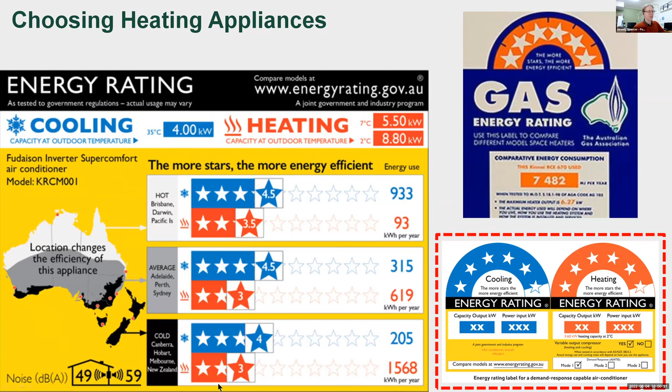Different technology performs better in different areas for reverse cycle air conditioning. So they've now split it into three different climates: black, grey, and white. You simply choose where you are and then read off the label - the more stars, the better.

You can, of course, go straight to the specifications of any heat pump system. What you're looking for is the line that says energy efficiency ratio or coefficient of performance, cool/heat, and that's the number you want to read off. So this is a super efficient one - for every kilowatt hour of energy it used, it actually shifted almost 6 kilowatt hours of heat.

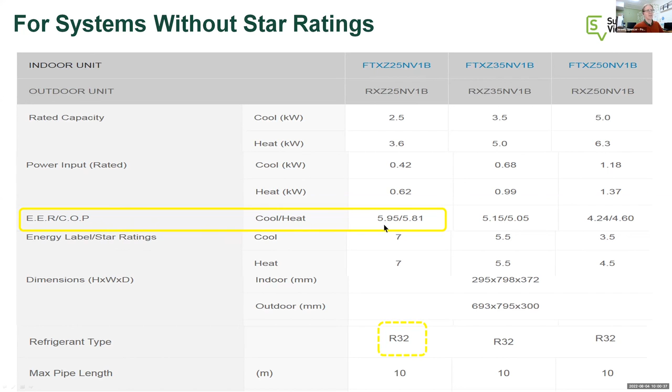All right, so if you are using heat pumps...

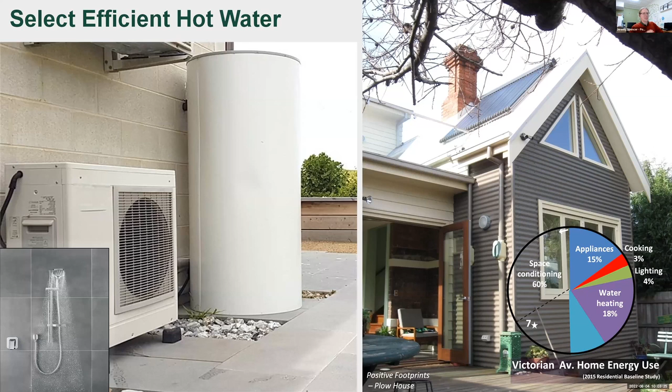All right, water heating - let's get into water heating. These are the two technologies I'd be looking at if you wanted to provide your water heating with a lot less energy than is in that particular wedge. One is the good old solar hot water, still works extremely well. To get on the rebate list as a solar hot water manufacturer, you have to have a unit that provides at least 60% of the hot water by the sun heating it over a year. The best go up to around 75, pushing 80% of your hot water provided by the sun. So it's still a very good option.

Over here on the left, you'll notice something that looks pretty similar to a heat pump - and that's because it's a heat pump hot water system. Once again, you can get heat pump hot water systems with a coefficient of performance around 4, so effectively you can provide your hot water with almost a quarter of the power. So both these technologies are extremely good.

The other one that's not part of the whole of home under the NCC at the moment is shower heads. But don't forget, in a house, 50% of your hot water goes to your shower. So if you put in an efficient shower head, you just use less hot water, so you save energy that way. And still, as long as it's a nice shower head, you don't lose any function out of that.

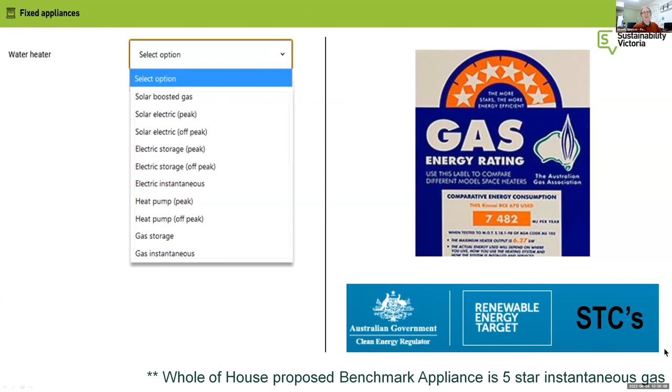In the tool itself, you get to put in solar gas boosted, solar electric off peak, electric storage, basically all the types of hot water that you can think of there. The benchmark appliance is a 5-star instantaneous gas heater, so a reasonably efficient gas heater.

If you're wanting to choose solar hot water or a heat pump, this is not a bad website to know about. It's the REC registry, called the STC calculator, the small scale technology certificates. Basically all solar hot water systems and heat pump systems that get rebates on them, and in Victoria they're getting rebates at the moment, need to have their efficiency tested, and the more STCs that you get means it was a more efficient system. You can scroll through the different models and options that have been rated there, so it's another good resource when choosing efficiency of solar hot water or heat pumps.

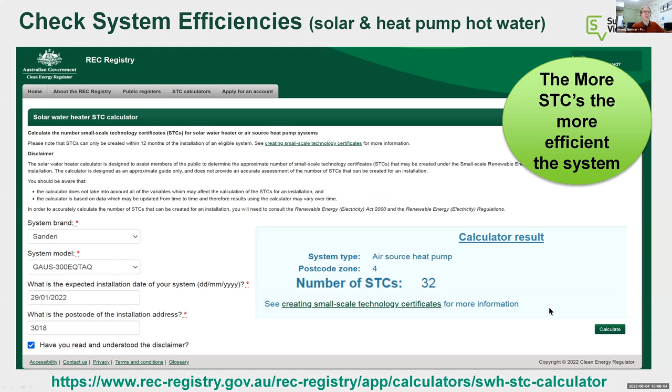The more STCs, the more efficient the system. And assuming that you choose one of these two technologies, you can provide that much hot water with a fraction of the energy. So that's the sort of saving you get. These are all just indicative, but they give you a sense of the benefit.

Lighting's only a small wedge, but it's easy to pick up some points here, because once again, this is compared to all existing homes. And if you're doing a new home, most homes these days are going to be LEDs. As long as you do LEDs, you'll get a bit of a saving on this wedge.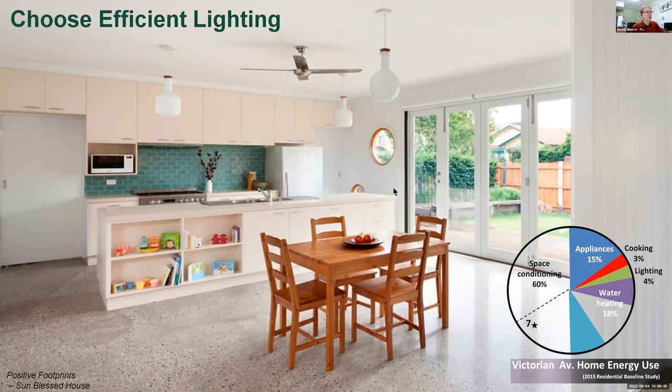The other thing is, if you can have lights that hang down into the space, you can have less of them to light a room. General rule of thumb is that one pendant light effectively gives out the same amount of light as 4 downlights, because they're much more directional - they don't spread the lighting as much.

What I've noted here, the whole of house proposed benchmark is 4 watts. So if you're under 4 watts, you'll get a bit of a bump in your whole of home assessment. And assuming you do that - the other good thing, if you have banks of downlights like I said before, your plaster layer is then a lot more leaky, and your thermal performance will go down. That is actually recognised in the NatHERS tool.

You have to enter in the NatHERS tool how many downlights there are and whether they're sealed or unsealed. So if you avoid them completely, you'll have a tighter structure and you'll get a saving on your lighting wedge - approximately that much, around about 40%.

Cooking. Now, cooking, like I said... Sorry, Jeremy, just a quick one about hot water.

Can you have solar preheating a heat pump hot water heater? Are there any like that? I've asked this question myself, and the answer is yes, you could, but at the moment the heat pump manufacturers - I think it voids the warranty of hot water feeding into them. So you could, and that would be probably the most efficient, but it's also a pretty costly way to do it. And you've already got a big gain either going solar hot water or just going heat pump to start with. So you're going for the nth little bit of extra performance by merging them together, for the extra $4,000 or so that you'd have to pay - or might not be $4,000, maybe extra $2,000. But either way, that's my answer there.

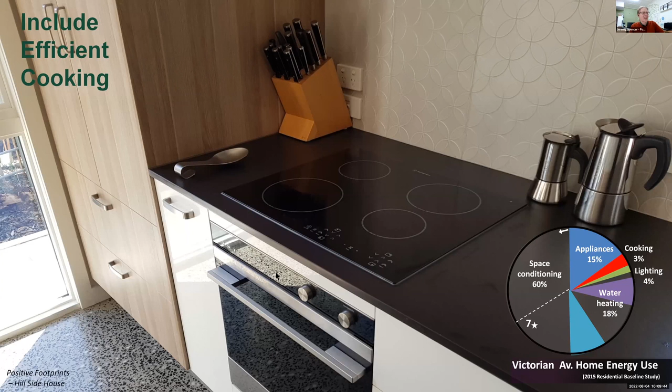And if you're trying to work out how much energy you use, it's really hard - you've got megajoules and kilowatt hours, two different bills, trying to work it out. So it does make things a lot easier for owners to manage their energy.

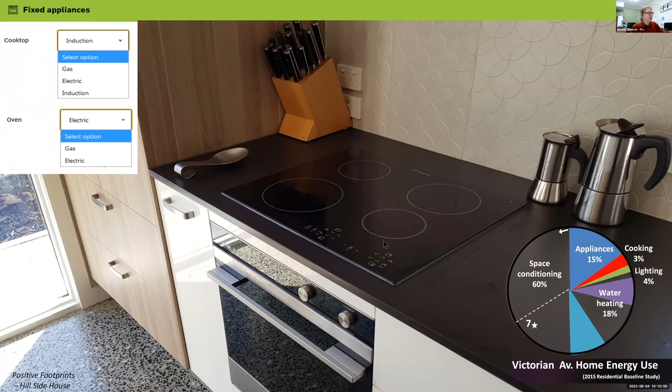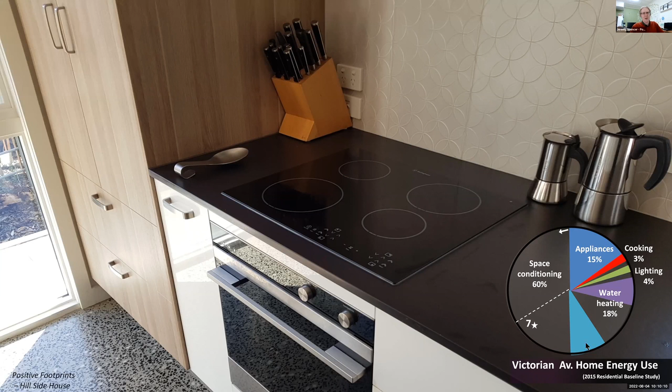In the tool itself, you've got gas, electric, or induction for cooktop, and the electric is just a resistance electric heater, your old coil type system. For the oven, you've got gas or electric. But assuming you go induction, you'll get a little bit of saving in that cooking wedge. And you see how we're starting to really eat away at the energy used in the pie in the average home there.

And the last wedge is the appliances. Like I said, the electricity consumption is calculated automatically based on the average new appliances for your house size. So they do look at the size of the home, how many bedrooms it has, and how many people are likely to live there when they're looking at the load of appliances.

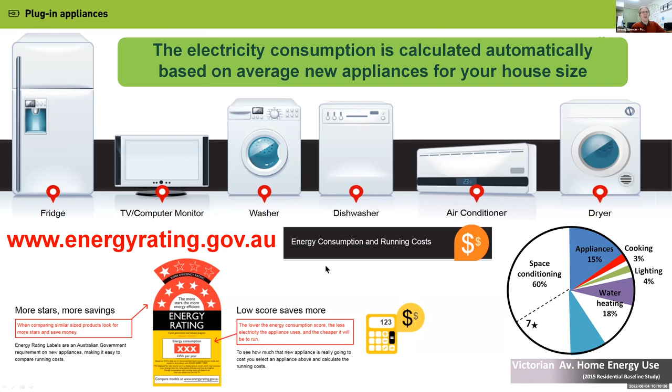However, if you can convince your clients, the owners of the home, to actually just choose the high stars, it's as simple as that. When they go shopping for refrigerators and TVs, especially those two can use a huge amount of power, especially the big TVs these days. If they're choosing the higher stars, it doesn't have to be the top star, but one or two from the top, that'll make a big saving. Each one of those stars is about a 25% improvement on the star before it.

And for some of these bigger white goods, you save around $50 a year each time you go up to a higher star just in running costs. So it does make a difference.

Especially if you've gone this far and done all this for the client to get a really efficient home, let them know. I often just give them a list of efficient appliances that I've used before and say, these are things that I recommend. And often when they go shopping, they come back with half of those things on their list and say, yeah, we're happy with those. The ones they do change, they often swap out for similar efficient models. So it's reasonably easy to get some leverage there.

If you do that, yes, you get a bit of a saving there on that wedge. It's not more than that because there's a lot of other things that get plugged into homes over time—phone chargers and consoles and so forth.

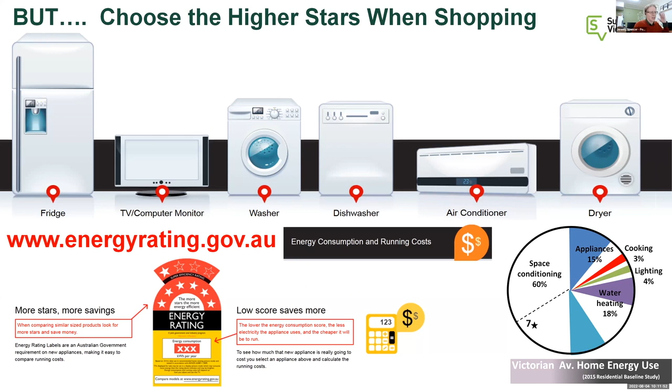The last thing that gets entered into the Sustainability Victoria tool is the pool, if you have one. You'd tick yes, and then you get to choose—under the National Construction Code proposal, all you're needing to enter is whether you've got a single speed, a dual speed, or a multi-speed pump. They all use slightly different amounts of power. But in the Sustainability Victoria version of the tool, you can actually put in some details about the type of heating if you want a more realistic idea of how much energy this home is going to use.

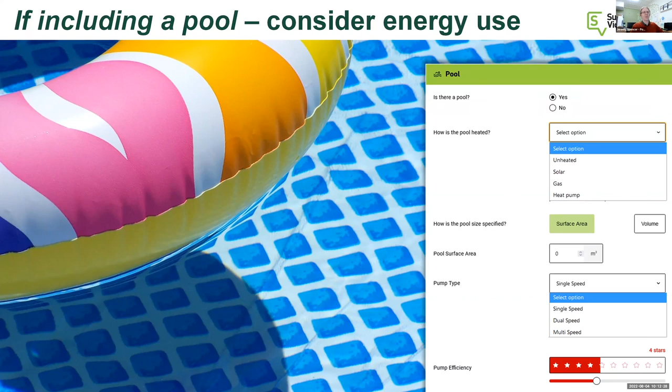And that is it for the tool. The very last piece of the puzzle is to include solar and potentially car charging. So we've eaten away a huge amount—we've probably taken two-thirds of this pie away just by efficiency measures. How much do we now need to offset to provide the power for just these wedges that are left in that pie there?

The Sustainability Victoria tool allows you to enter different sizes, and you can put in batteries as well if you want, that question before. Then you can use that data, and it will let you know, when you press compute, whether your house is producing as much power as it's going to need over a year, over a 12-month period. So you can use the tool that way.

What we've found ourselves—we've probably been building net zero homes. Our first one was back in 2012 when our owner brought us their bills and said, look at this. So we've found if we take this whole-of-home approach, put in efficient appliances, most homes start breaking even somewhere around 5 kilowatts of panel or so, depending on the size of the home there. So yeah, just something to consider.

And when you consider that the average standard system size going in at the moment is 6.6 kilowatts, this is a potentially very realistic pathway for the industry to go. We could be one of the first industries to move to net zero, if we push all this through.

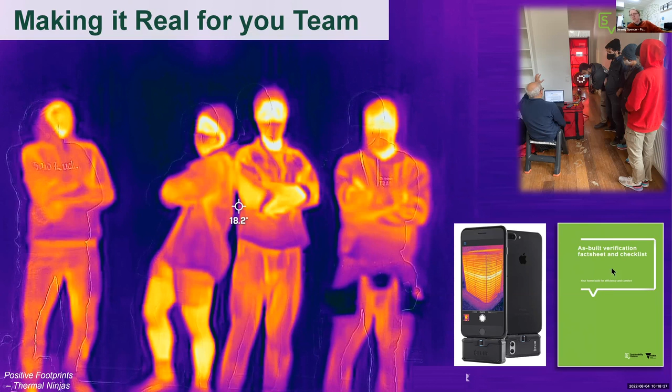Sustainability Victoria put out a fantastic little as-built verification fact sheet and checklist, so definitely look out for that.

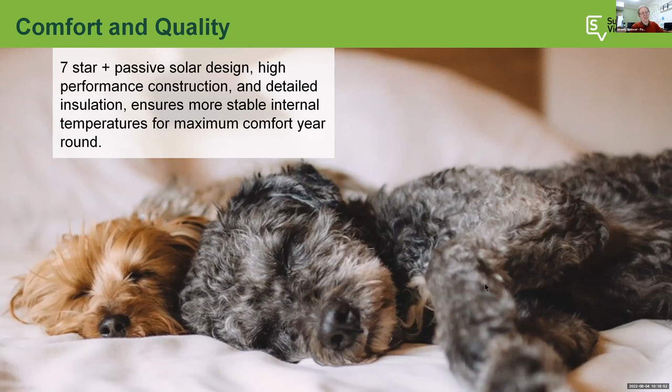Lastly, we've done all this work - what can be achieved? Well, 7-star passive solar design gets you high performance construction with detailed insulation. Basically, you get a very comfortable environment. The temperature can be going up and down outside, but inside you're going to have a much more stable environment. You're also going to get, potentially, if you put in double glazing and you've done your insulation well and minimized gaps and cracks, a very quiet house. It's going to be a bit of a sanctuary from the outside.

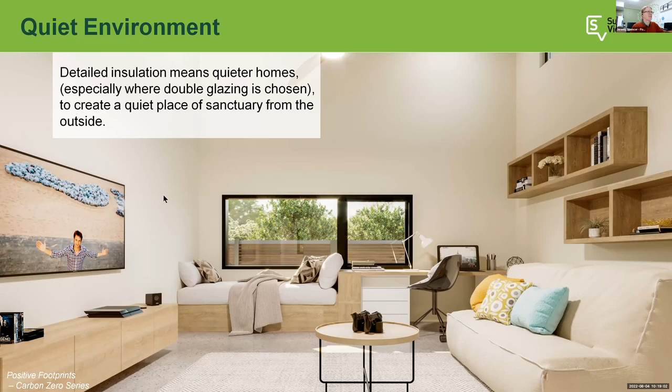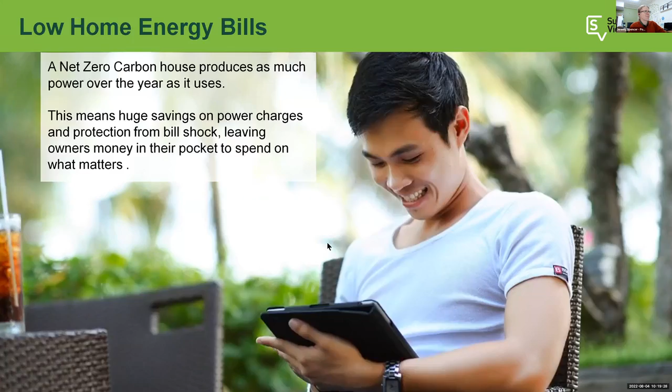Home energy bills - if you saw originally, the average house has $2,300 or so in electricity and gas bills. If you put them together, you can minimize most of that and have just the connection fee and maybe a third of that bill left over. So that's a lot of money for the owner to save ongoing over the years. And lastly, we're doing this for the environment - we now have the technology, the know-how, and this new Sustainability Victoria whole of home tool. We basically have what we need to get our industry to net zero and save those 8 tons of carbon being emitted into the atmosphere every year.

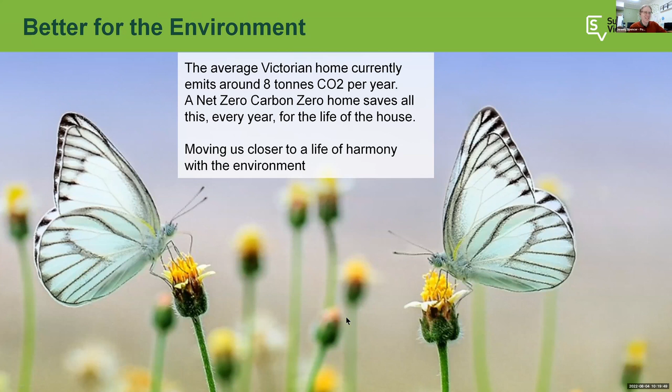All right, so that's it, Phil. I don't know if there's any questions left or whether to end it, but I'll leave that to you. Great, thanks very much, Jeremy. No questions at the moment. But thanks very much for the presentation - having done this myself, I know it's really hard sitting in a room all by yourself talking to a screen. But hopefully it looks like there were some really good questions, lots of good information for people, and it looks like most people have hung around to the end. We got some people thanking you through the Q&A at the moment. So thanks very much, Jeremy.